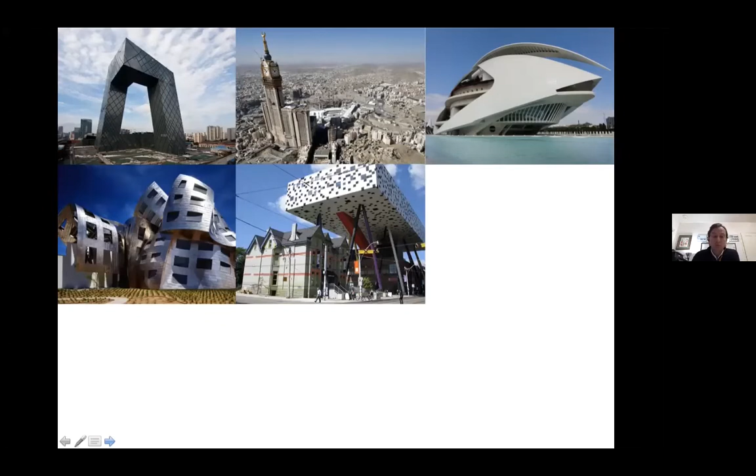This is a building called the Sharp Center by Will Alsop, that is a design school in Ontario. Again, one might wonder how this building stands up. It doesn't look like it should stand up. Is this the message that we're trying to teach in our design schools?

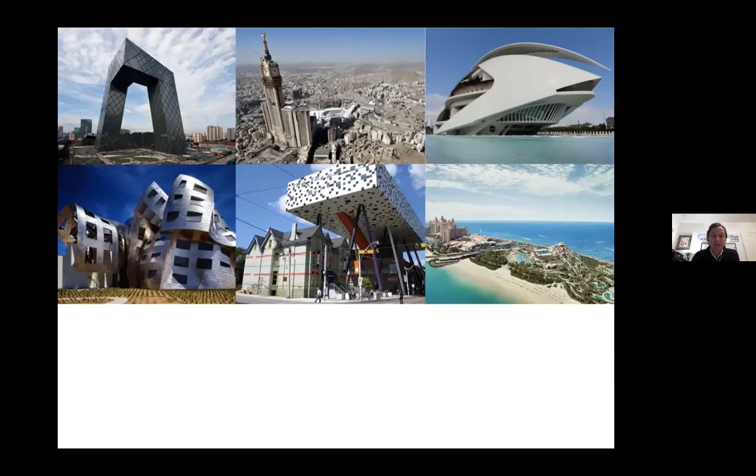And there are many other examples. This is on Paradise Island in the Bahamas, Atlantis. It seems absolutely absurd to introduce this completely foreign aesthetic onto this perfect island. These islands that were built in Dubai, this is the Palm Jumeirah island, the only one I think that was finished. And they've created immense environmental issues, even though they were presented as environmental projects.

And finally, the Burj Khalifa. One might think that skyscrapers make sense in very dense urban environments, but it's interesting that the very tallest skyscraper in the world should be in the middle of a desert. Why would that be? So are we, in fact, studying nature enough? Should we be studying nature more to have it teach us how better to use our resources, how better to make our references, how better to relate to our environment?

The second quote I have from Wright is this one, and now we're talking about the home. Wright asks, what is the matter with the typical American house? Well, just for an honest beginning, it lies about everything. So a very damning representation or commentary on the American house. Why so damning a commentary?

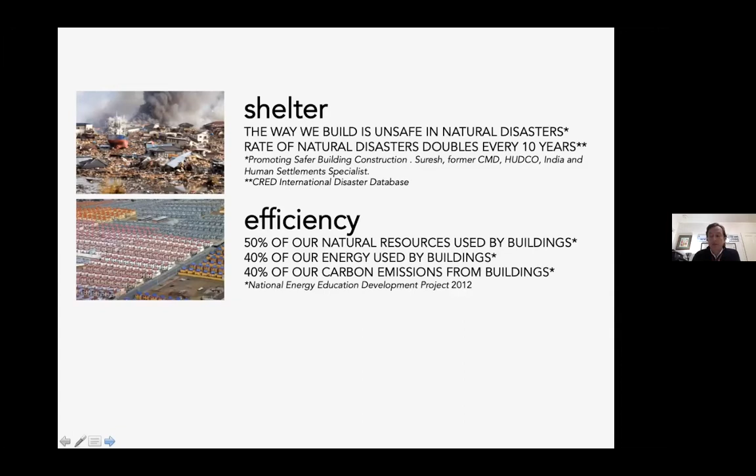And finally, with regards to affordability, one need only say that 1 out of 4 people in the world today is living in substandard housing to recognize that we need to do a lot of work in the construction industry. And I think as a whole, there are tremendous opportunities to improve the way we provide shelter, the way we make that shelter efficient, and the way we make that shelter, very importantly, affordable.

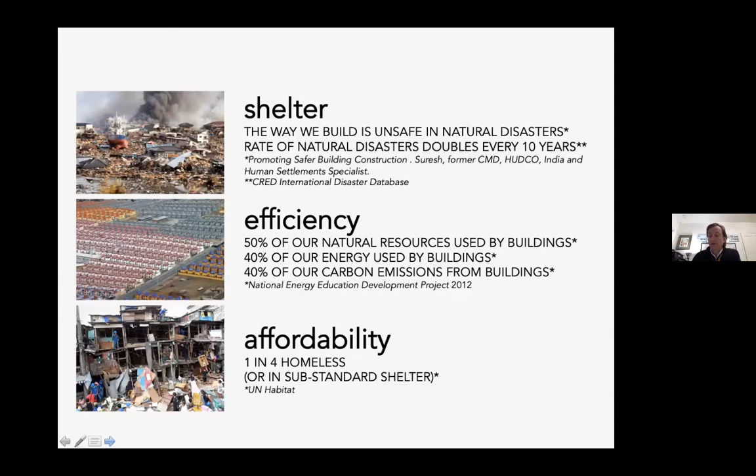Which brings me to the final quote from Wright. He says, I promoted plasticity as conceived by Lieber Meister, which is what he referred to, of course, Louis, that's how he referred to Louis Sullivan as his sort of mentor. I promoted plasticity as conceived by Lieber Meister to continuity in the concept of a building as a whole. If the dictum form follows function had any bearing at all on building, it could take the form in architecture only by means of plasticity, when the work is seen as complete continuity.

So why not throw away entirely all implications of post and beam construction? Have no posts, no columns, no pilasters, cornices or moldings or ornament, no division of the sort. Any building should be complete, including all within itself, instead of many things, one thing. So here we can, I think, maybe better understand what Wright had an issue with in regards to the American house. He was here thinking again about a natural home, a home that didn't rely on references that were antiquated and no longer relevant, a home that was holistic, entirely holistic, one thing.

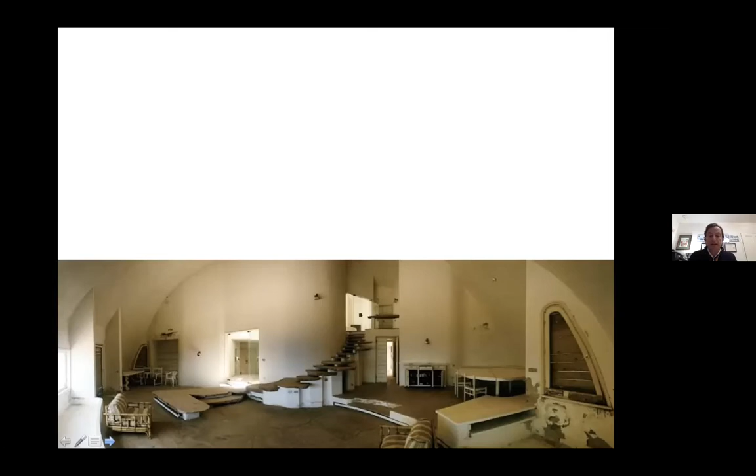That way of building, it turns out, is no longer code compliant due to contemporary law codes. But I've developed another way of building that results in far more fluid forms that are able to go beyond the dome, but that still use the concept and the out-of-the-box thinking that my father was an incredible pioneer for, and a mentor to me. Still using air pressure, but freeing the form from a radially symmetrical shape. We're able to arrive at buildings that are still incredibly simple to build, incredibly interesting formally, and incredibly efficient both structurally and environmentally.

In the same way, the exoskeleton, the building envelope itself, does all the heavy lifting. There is no need for any columns or structural support on the interior, allowing incredible flexibility on the interior and flexibility over time if one were to want to reconfigure one's space further down the line.

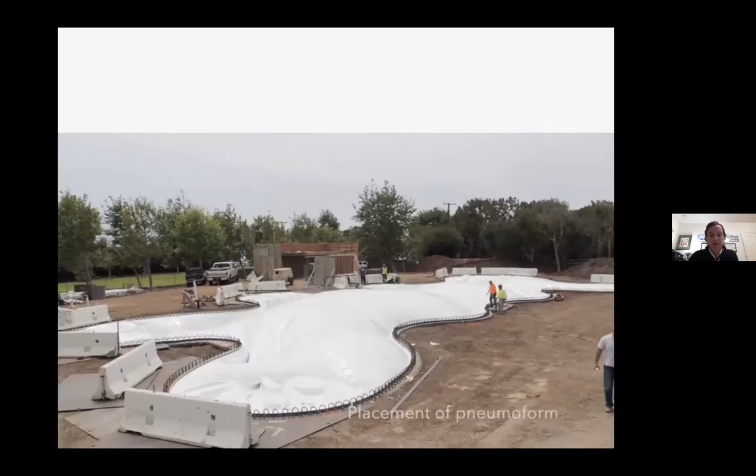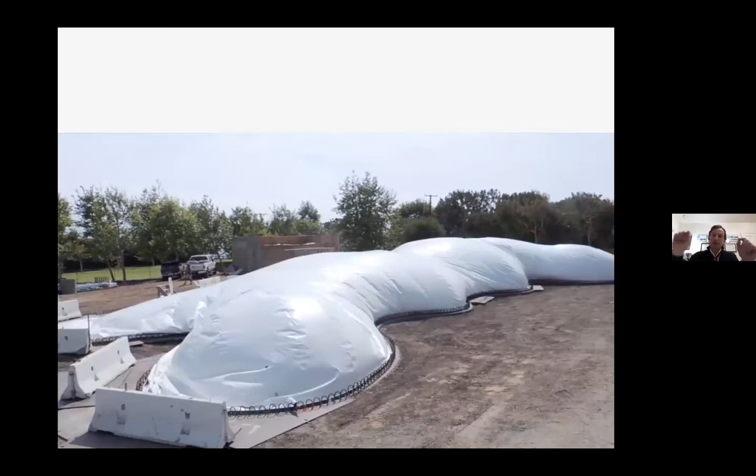This is a little video I put together to illustrate how we build these structures. And I'll just go through it and sort of illustrate what's going on. Here you're looking at the foundation. We place what we call a pneumoform, which we attach along the perimeter and then inflate.

Oops, sorry. I guess I can't do that.

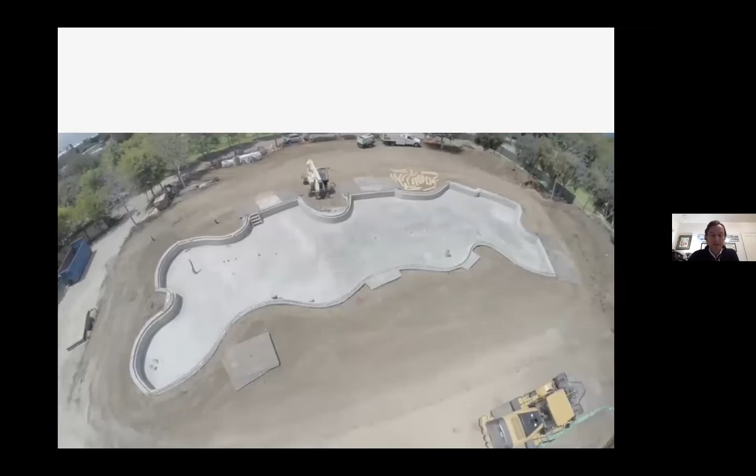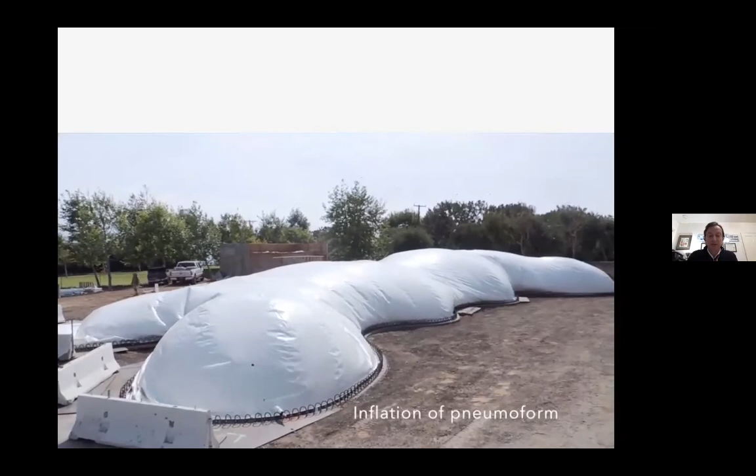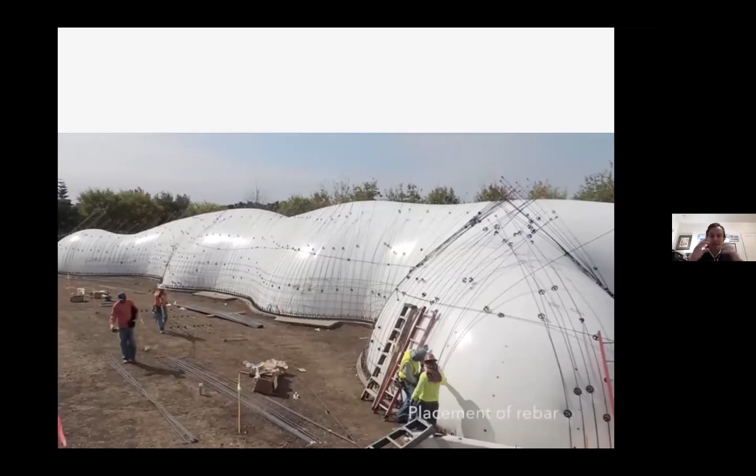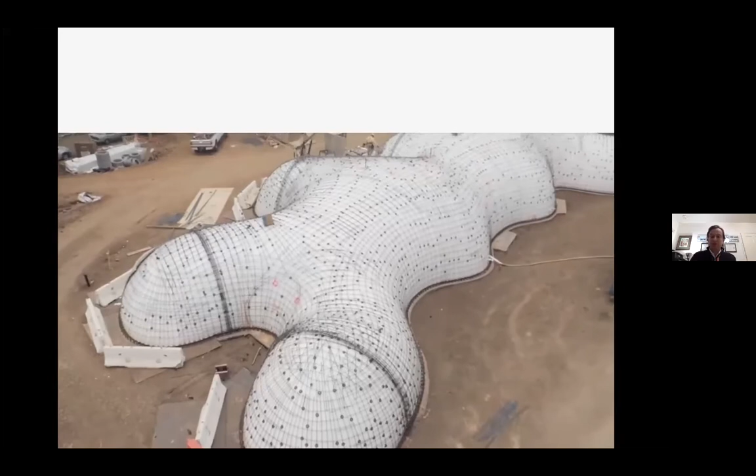Okay, so again, this is the pneumatic formwork that is inflated. The inflation process takes just a series of hours. The foundation itself is just a slab on grade. Once the pneumoform is inflated, it's verified that it's the exact same shape as was designed. The rebar is then tied, placed. It bends, of course. It's generally 3/8, number 3 rebar, 3/8 of an inch in diameter.

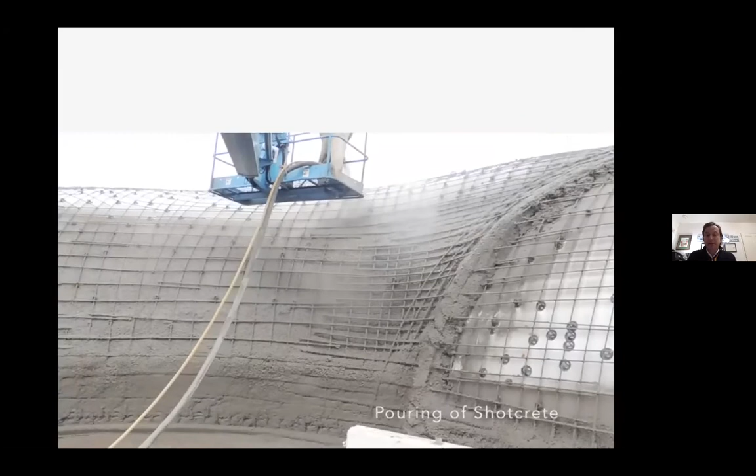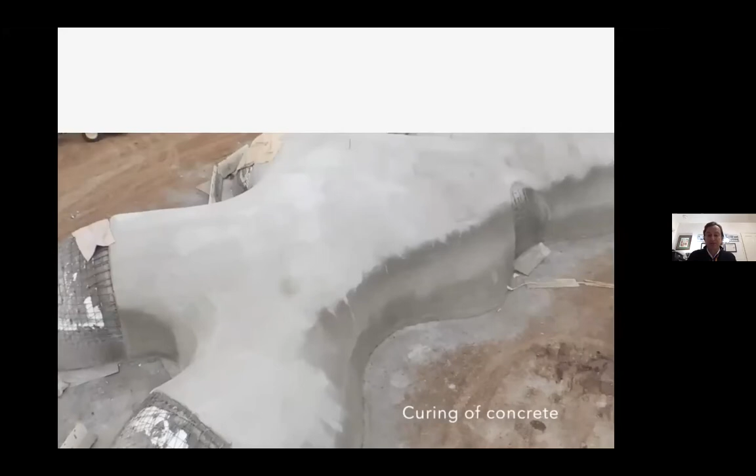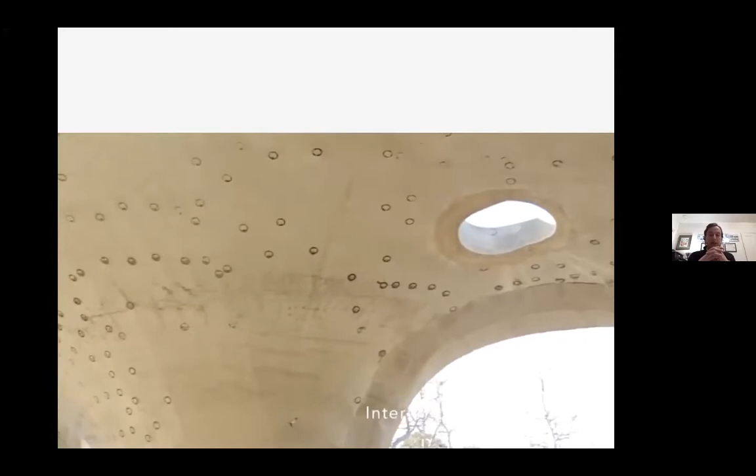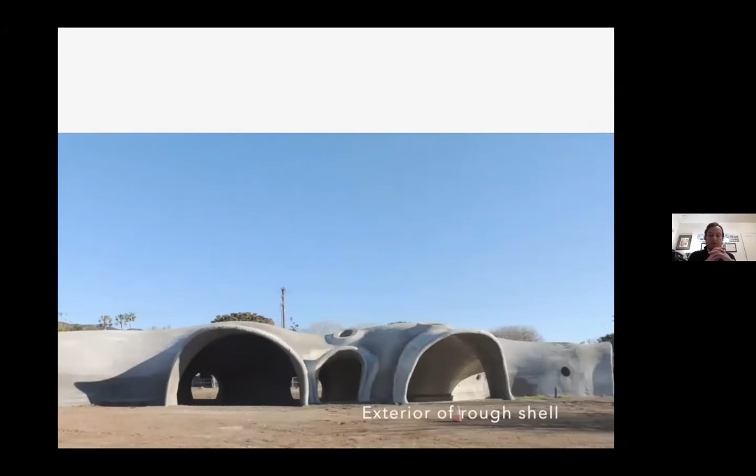So it's tied, it's verified by the inspectors, and then the entire shell is shot. That takes a day to shoot. This is a 5,500 square foot building, so relatively fast. And once the concrete is cured, the pneumoform is disengaged, can be reused, and you can see the thin nature of the structure. The proportions are actually the same as the egg, interestingly enough, but a very dynamic shape that is wholly natural. It's not organic because it's curved, like so many other architects refer to organic architecture as being, but rather organic because of how it was built and how it was designed.

And how it was designed has everything to do with Pascal's laws, and very little to do with any architect's ideas of proportions. And in that, it's very natural. It's very pan-cultural, but also it's very efficient, both from a structural standpoint, which I'll describe why, and from an environmental standpoint.

So the advantages of the technology are as follows. We use less than half the material and about half the labor. Those being the two biggest line items in construction projects in general, amounts to the structural shell costing about half as much to build. At the same time, you have a very fast process, about 3 times as fast to build that structural shell, because you're leveraging air pressure, which is a resource that we have infinite availability towards.

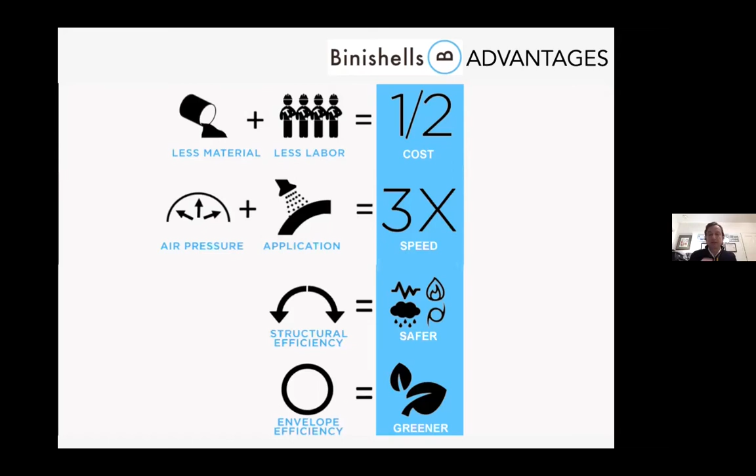When you have a building that's one material, the same thickness from the foundation to the walls to the roof and ceiling back down to the walls, you have the perfect building envelope from an environmental standpoint. And when you insulate that envelope appropriately to the temperature zone it's in, you get efficiencies on a completely different level. We are able to reduce life cycle footprints, not only for the embodied energy of the building, because we use less labor, less material, and greener material with geopolymers in the concrete mix, etc., but also use tremendously less energy to heat or cool the building.

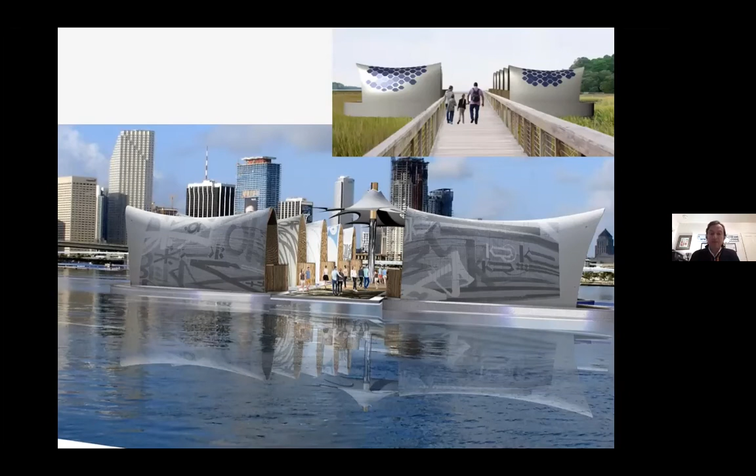But one of the advantages is that it comes with these big openings front and back, so that you can let light in, and also you can have rectangular or square windows. The special equipment required to build this is for the construction, but it fits on the back of a truck. So it's quite efficient from that standpoint. And of course, all the special equipment can be reused. So with one truckload, one small flatbed, you can build a village of these things.

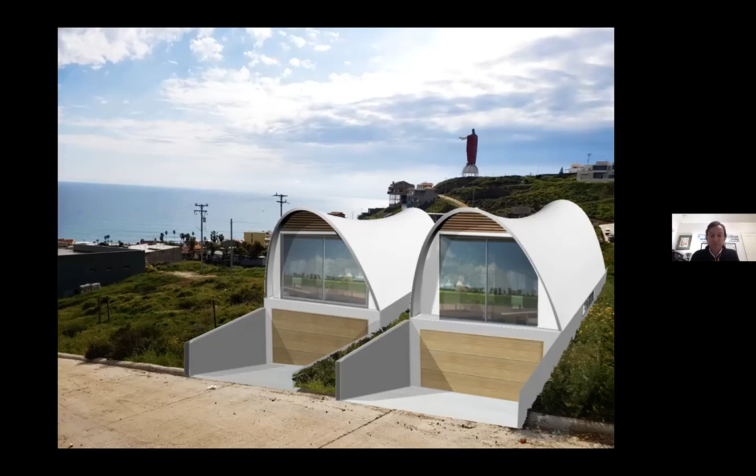And the idea is that hopefully some of these technologies may be considered eventually for housing and disaster relief. We're also looking at solutions that propose high density opportunities, or that can be 5-10 stories, but still have all the environmental, structural, cost and speed advantages that the other technologies propose.

So again, going back to Wright, the idea and the major inspiration for me is nature, and how we can mimic it and learn from it in our designs, and specifically, I think in our construction, which then informs our design in a very interesting way. Thank you so much.